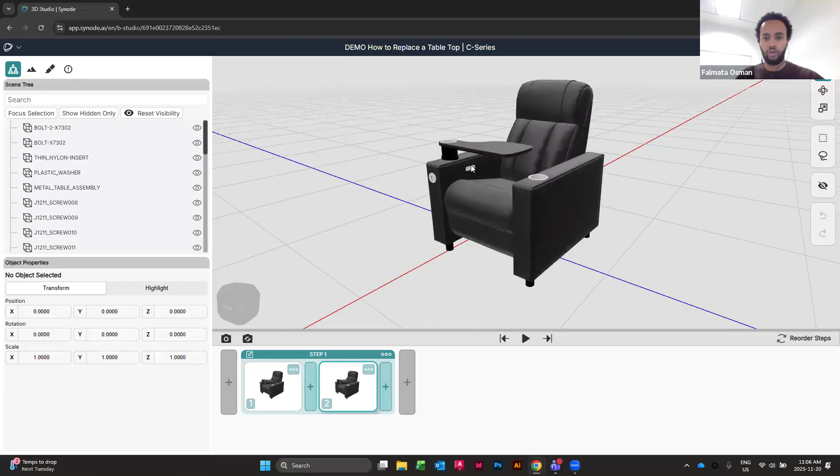It's like a keyframe system. I'll create a keyframe and then lock in that camera perspective right there, then create another keyframe and zoom in a bit more, and get that perspective right there.

After this, I would want to preview this step just to see what that animation looks like. It looks pretty good. I'm super thankful that you have the option to preview the animations as you go, because for people who don't know, I'm a 3D artist through and through. I love working with 3D, but sometimes with traditional 3D software like Maya and 3ds Max, it's very complex to set up a camera system. So it's nice to save the camera angle as the preview and then preview the animation. It's super simple.

And it allows you to fix anything you might see as you're editing. For this step, do you want to add the text first so we can give viewers a chance to look? I actually have the text here, so this is the first step. Write any instruction you might need, whether it's a step or welcoming the user. In this step one, I mentioned remove the cup holder by loosening the locking screw. Once you press confirm, as you might have seen in the preview, it'll start showing you the text at the bottom and then plays the audio as well.

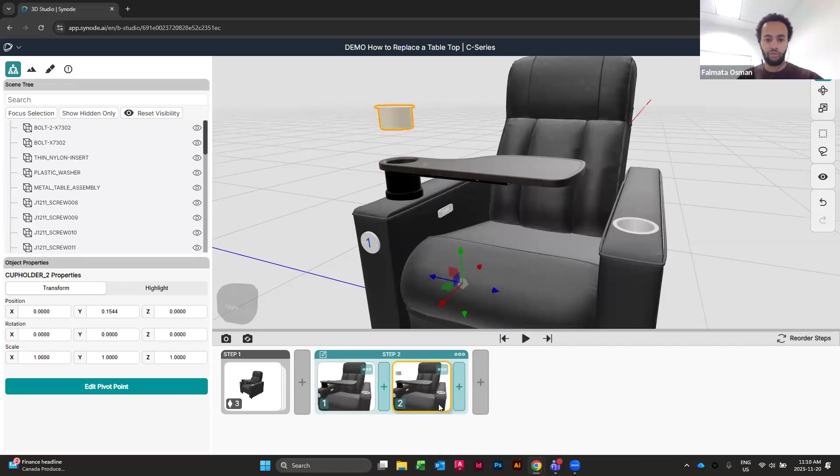Feel free to move on to the next step, Falmata. For sure, for step two here, I'll show an animation of the cup holder being removed. I selected the cup holder, and I'm going to create another keyframe here, and then simply move it up. It'll show in that keyframe that it's moved up, and then I'll create another one showing the cup holder disappearing.

And then we could preview this to see what it looks like. It shows it gets lifted up and then disappears.

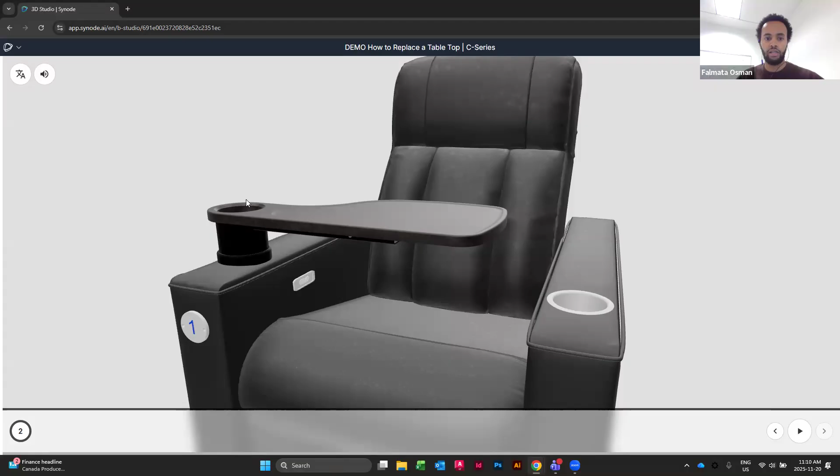And then this would be a great opportunity to put in that instruction for step two, saying lift the cup holder and put it to the side, as we're going to be removing the tabletop.

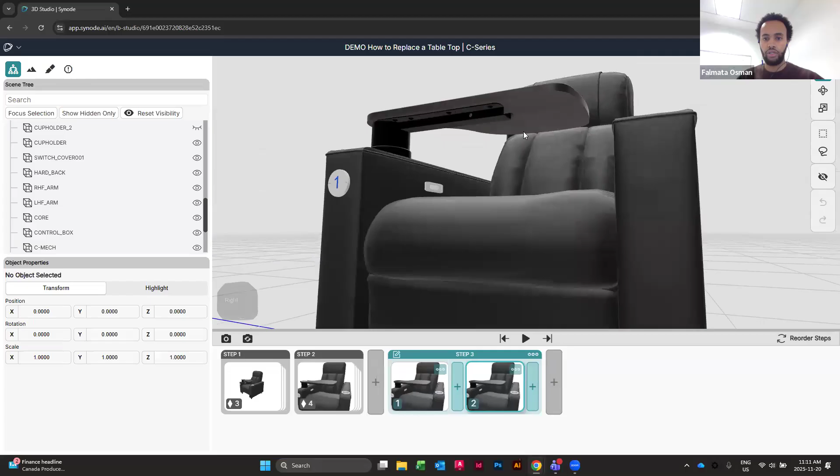Perfect, I'll go to this last step here, step three. For this one, I'll change the camera angle a little bit to get a bit underneath the table. So I'll create a second keyframe here, zoom in a little bit, and then angle myself right there, and update that.

There we go. For my next keyframe, I'm going to select these screws. Actually, before you shift-click individually, which you can do, if you go to the scene tree and click focus selection, it'll take you to the highlighted meshes. That way you can shift-click the actual meshes in that tree as well, saving you even more time. If you want to do an example of that, for sure.

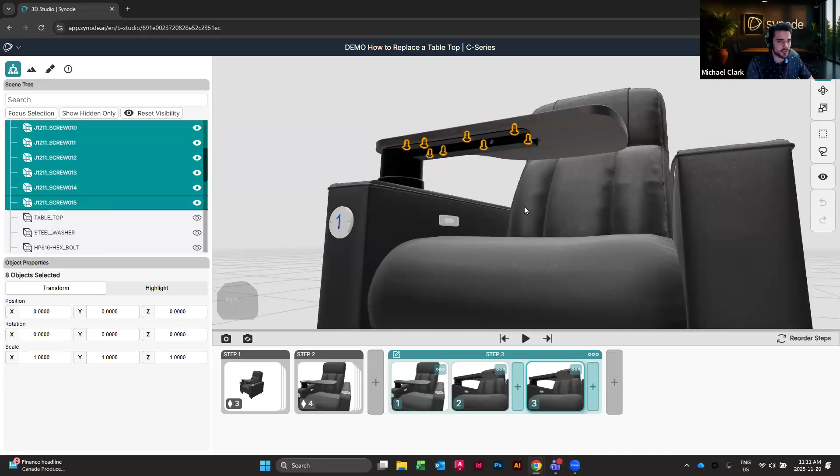So these are all the screws that I want to select. I'll select this one here, then shift-click to the last screw. There we go, perfect. Shift-click - so all of it is selected now.

Then I'll come out a little bit to see my grabber here, and bring down those screws. Perfect, gets updated there in my keyframe. Then I'll create another keyframe.

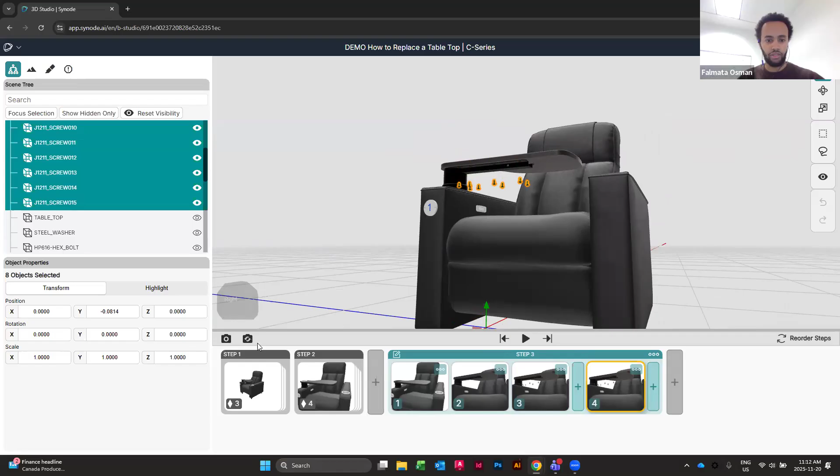If you want to jump back to that camera angle, all you have to do is press the refresh camera angle. So if I jump back right here for my next keyframe, perfect, I could hide all these screws as well. There we go.

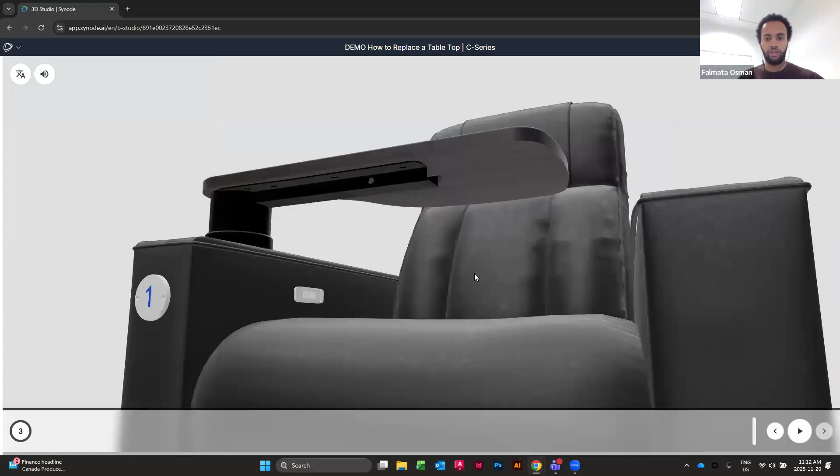So for this step three, I'll preview it to see how it's looking. It swoops down, shows those screws coming down, and then disappears. Perfect.

Okay, now I'll essentially reverse those instructions back, as if you're putting things back together once you're done your replacement.

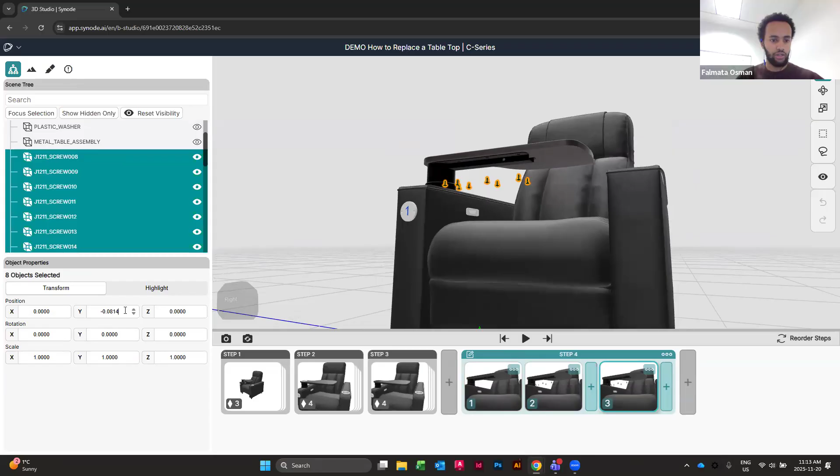So I'll jump into this keyframe, come to my screws here, select my screws, and then unhide them. Then I'll create another keyframe, come back out, and change their origin point back to 0 so that they're back to the table. That's done with the object properties panel.

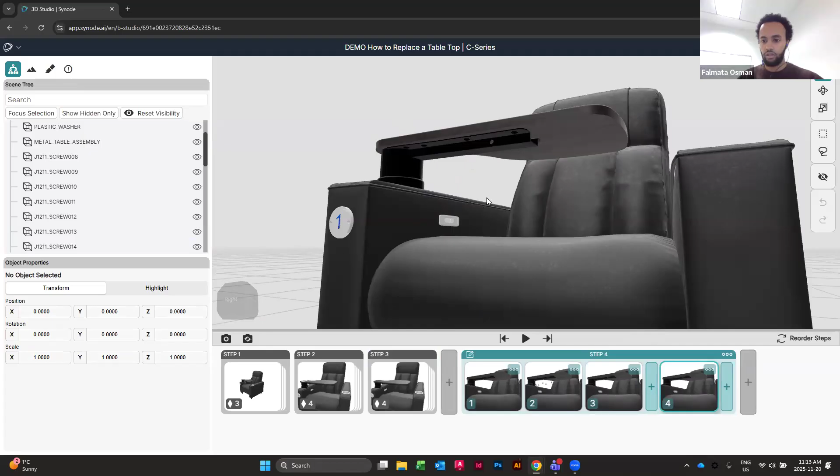So everything's at 0, back to its default position. Looks good there. Then I'll create another keyframe and just jump back up here. And then we'll create a step five here.

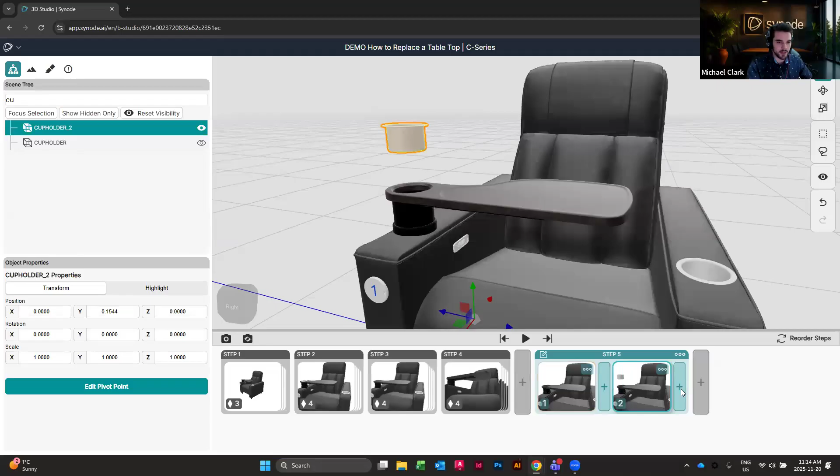I'll delete that, and in this step we'll bring back the cup holder. So in this keyframe, I'll search up for the cup holder. There it is, and I'll unhide it. Then bring it back down to my origin of 0, enter, and there it is.

So I could have another quick preview just to see how this step looks. It comes in. Perfect.

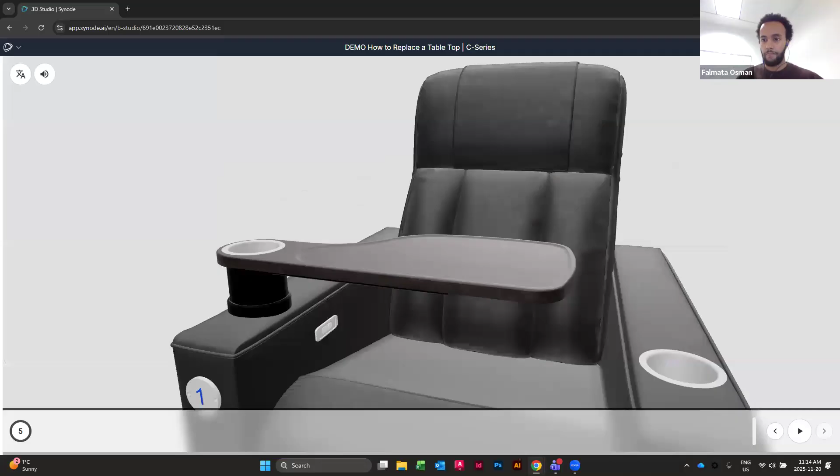Yeah, perfect, and those are the five steps that I think we wanted to show right there. And what was that, like five minutes?

Not even, yeah. So that's basically the message that we really wanted to point across, where creating simple animations - you don't have to use traditional software and render out 30-minute sequences for 5-second animations.

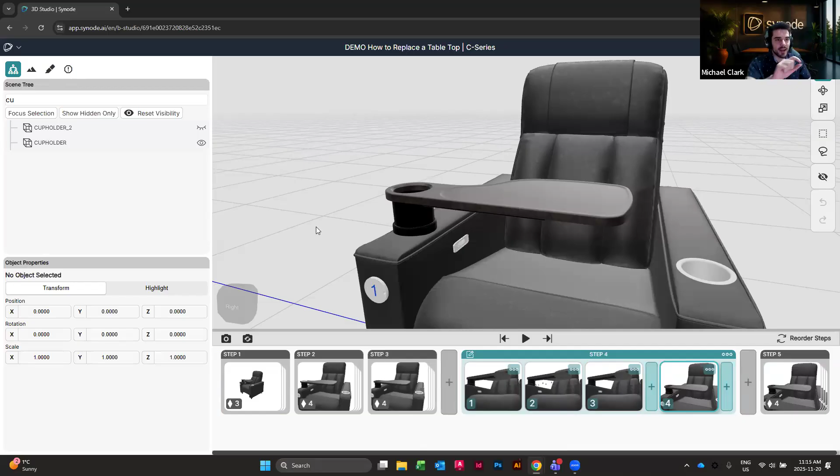The goal of this is that anyone can use this to really promote their product and get the message across, because when you're looking at a PDF, you obviously can't rotate the object like you can right now. If you want to do a quick example and rotate around the chair, you can literally see every detail to really show off everything and make sure no detail gets missed.

That's the important message. Yeah, exactly. One model can generate multiple procedures and instructions that you have in your production line. You can literally save this as another instruction, copy and paste this over, and it's just super simple.

So now that we have our instruction finished, there's just some questions I'd like to ask you as well for this. So the first one being: what exactly is Encore's goal with these interactive guides?

I believe you told me its main focus is for your assembly line, but maybe you can go into more detail. Yeah, for sure. A lot of our documents or PDFs have either been outdated or sometimes clients might not fully understand them, or want something a bit more easier to understand. So that's something we were hoping to achieve with Synode, creating instructions that are easy to understand. It's very concise and gives you something visual, something easy to comprehend, right?

Yeah, absolutely, and I think that's what we've been achieving. And what I mentioned about the assembly line is, like you said, there's so many different people that might look at your product. Our manufacturing team is in Mexico, so a lot of times our instructions are in English, and that might create a lot of confusion. So having that language feature, being able to switch to Spanish whenever it's needed, as well as having a visual aid - let's say if they don't want to see the text, they want to be able to see what part you're talking about specifically. That's something we can show directly there.

Perfect, thank you. I'm seeing here that we're approaching 11:20, so let's jump back into the builder because I want to show that once you finish your animation, project, or instruction guide - there's a million terms for it - what I'd like you to do is just click save at the top right, so it saves all your progress. Because once that's officially saved, we'll have the chance to actually publish your project and see how easy it is to share your project with the world and attach it to your products.

So by clicking publish in the top right, the teal button, it should bring up a pop-up that'll say, do you want to publish this project? Click publish. Now if you'd like to go to the top left, where it shows the Synode logo and drop-down arrow, we can click sharing. From here you have a bunch of different options to share your projects via a QR code. You could literally print this QR code and slap it right in the box of your product. So when customers scan the QR code, it takes them directly to the instruction they can view.

You can copy it via URL - if you wanted to, you could open up a new tab and copy that URL and preview it right away. And lastly, with the embedding code, if you guys have your own websites that have your products, you can attach this entire interactive instruction onto your website, so people can scroll through and see how your product works, how it gets assembled. I think that's really cool.

Another feature I love to show is if you go to the top left and click registration, then toggle that on. So if you wish, at the end of your instructions and animations, you can have customers register with your product, giving you their email and their information. They'll input their first and last name, email, date of purchase for that product, and optionally any serial numbers or instruction sheet numbers.

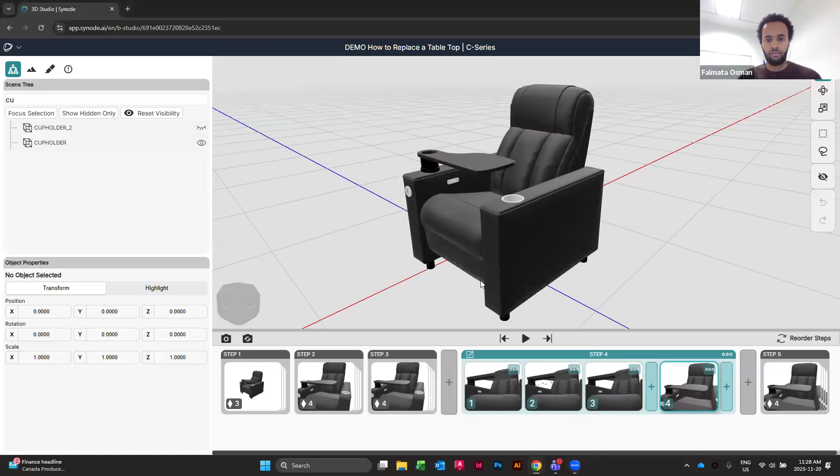Sure. Yeah, so I could kind of give my perspective on the highlight feature. It's definitely something I've used a lot. As you can see, on our recliner, a lot of the parts are black, so it kind of gets a bit difficult to see exactly what part you're highlighting or instructing.

So if I jump into this keyframe here and show these screws, let's say I want to highlight these two screws, just to make sure you don't lose these screws or put them to the side. So I would jump into this highlight feature, select highlight selection. It makes it white right now, but let's say I want something brighter that's easier to see, so I could pick a nice bright yellow color, and there the steps show it right there.

So the highlight feature is definitely something I've used a lot, and it's kind of enhanced our instructions as well, being able to clearly see what object we're indicating, and reducing confusion, like whether he means this part or this small one here. So when you highlight it, it's right there. We have quite a few questions as well, but we're a little strict on time.

So I will answer these questions as quick as possible. Do the embeds work on mobile too, like an iPad? Yes, Synode works across all devices. We've tested it with great performance, so like iOS, Android, Google phones, it works across all of that as well.

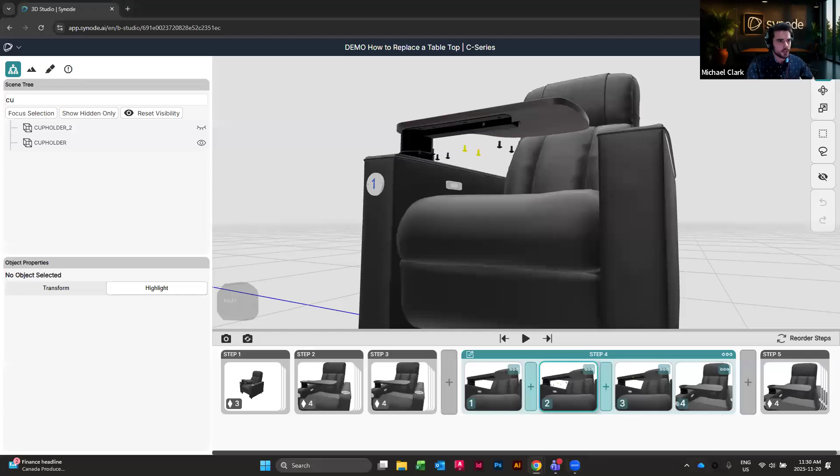If you go to the top left, you should be able to save as. So you can actually save it as a different version, because if there's another version that actually works with this exact model, and you just want to avoid the hassle of dragging it in and creating a new project, you can absolutely do that.

So if you'd like, just click new version and it'll show you - you don't actually have to click save if you don't want to, but you can save it as a new version. You can name it, or it will automatically name it for you. So it's just version 2 if you want to continue working on that, or you can save it as a new project entirely, which there's also an option for. For a new project, you can change the name, but for versioning, it just names it for you to save you more time there.

But yeah, perfect, I think that's all the questions we'll answer for today. Falmata, thank you so much for joining me today and giving your insight and experience working with us. Hopefully a lot of your clients, customers, and manufacturers are a lot more happy with these types of guides to help them.

Yeah, I appreciate it, Michael. It's been great. Yeah, perfect. So thank you so much for joining, and hopefully we can do another webinar soon, because this was a great experience for me, since I believe this was our first webinar for both of us. All right, Falmata, take it easy. All right, take care, take care.